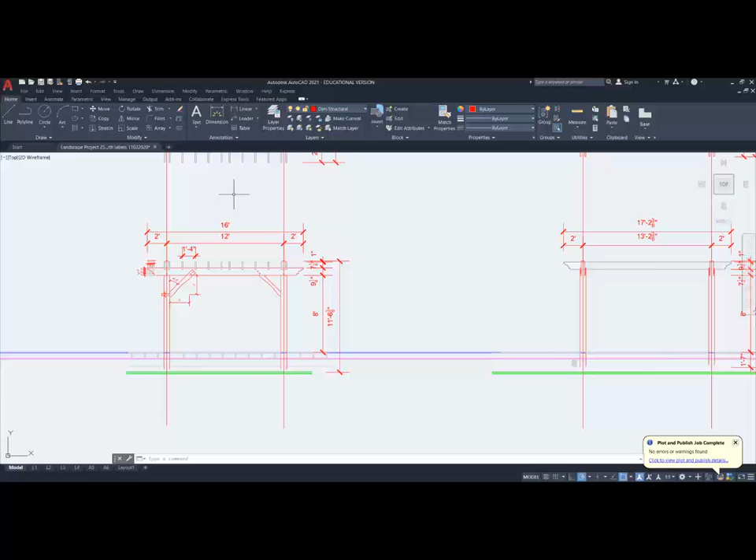Now I've drawn my sectional elevation. So at 8 feet, I've got my blue deck. The deck boards I'm using are 5/4 inch. So I've offset that 5/4. And then I've taken the top line and offset that 7.5. That's my deck height that I've decided to work with.

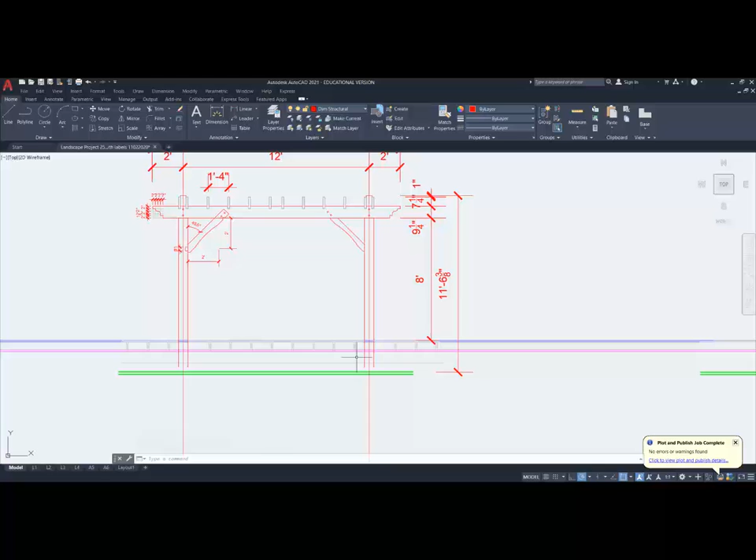And then I've placed in some of the joists that are going to be in the project because the joist sits on the beam. I'm using 2x8s for my joist and my beam. You can just see the top of the beam, and then you can just see the bottom of the beam. So the beam thickness or height is based on the calculations we did much earlier in the program.

So I've already offset those lines. Now I've got to determine how do I connect all this, how is this all going to work together. So this first post sits on top of the beam, but the actual column is offset. So I got to keep that in mind. What can I do to help me with that?

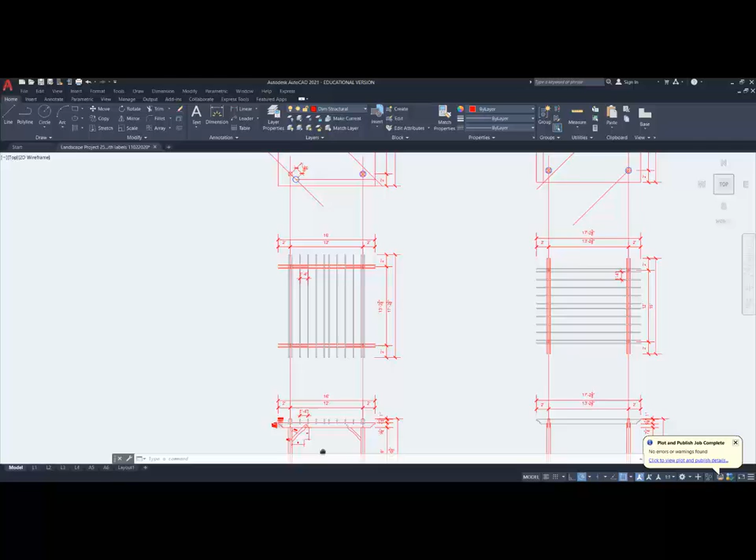I'm going to take this drawing here and copy the different elements. So there's that, there's this, and there's that. This is the independent one. Okay, so I'm going to take that. There's my base point. Zoom out, pan down, and make sure it's perfectly aligned. There it is. And that's my two conditions.

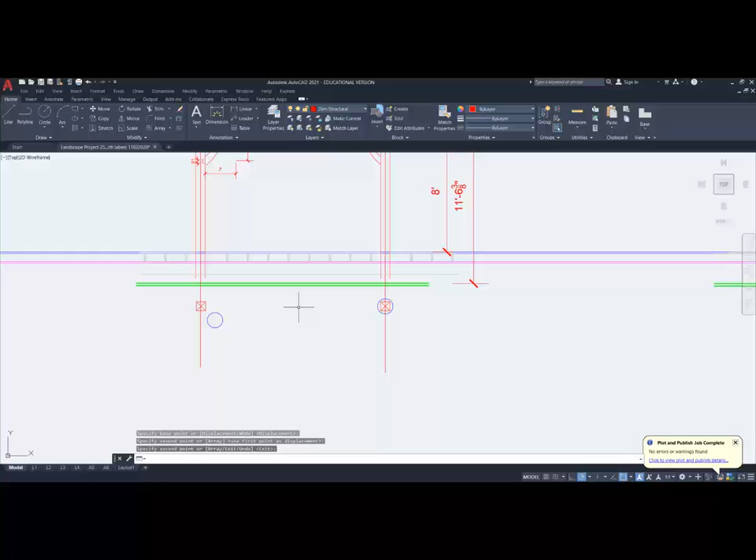So this is my plan view. There's my top view. These are the concrete columns. So I'm going to take the outer edge of them. That is the quadrant from here.

Extend that straight up. I'm in the wrong layer. Thought I switched layers, obviously I made a mistake. I've got a pergola concrete layer. There we go, and I want to make that current.

Good, and then I'm going to copy this from that location to this location. Okay, so the way it sits right now, that is the width of the concrete column. Okay, I've got that already here. I might as well copy that over, from the center point of this column to the center of this, so I know where my two columns are.

Great. This post sits on the beam. The beam sits on the column. Okay, so what do I know? Well, I know a couple of things.

First of all, I know that my footing, and each of these will have a footing, and we'll talk about footings a bit later on - the footing has to be at least 4 feet below finished grade. There's my finished grade. So I'm going to offset by 4 feet this line, and it's always the top line.

And now I know the distance to here, my actual concrete column. There we go, and there we go. The concrete column will support the beam, the beam supports the post. Great. Okay, so this line is just a temporary construction line.

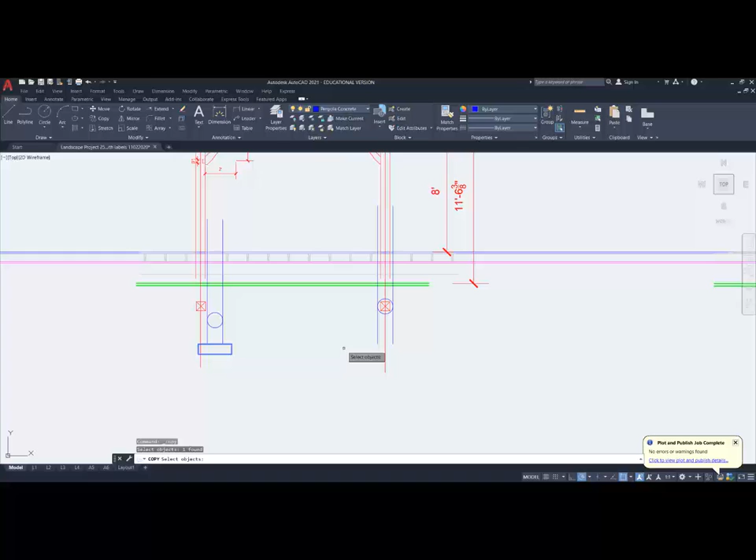Now I'm going to copy that. I can't go from center to center because the centers are at different heights, but I can go from the edge of this concrete column to a point perpendicular to the edge of that concrete column, and there we have our line work. It just so happens that when I copied and pasted it, I did it the right way, so the extension of the lines matched. This also shows me that the wood pergola post is offset from the center of the concrete column. So those are all critical things.

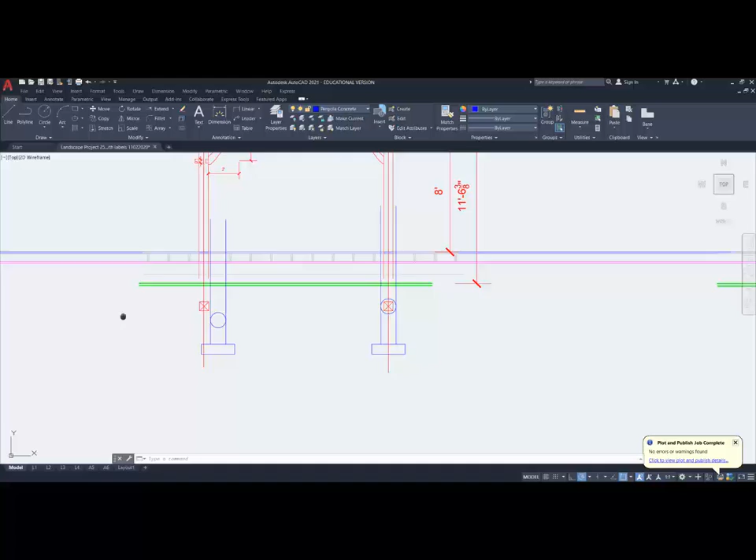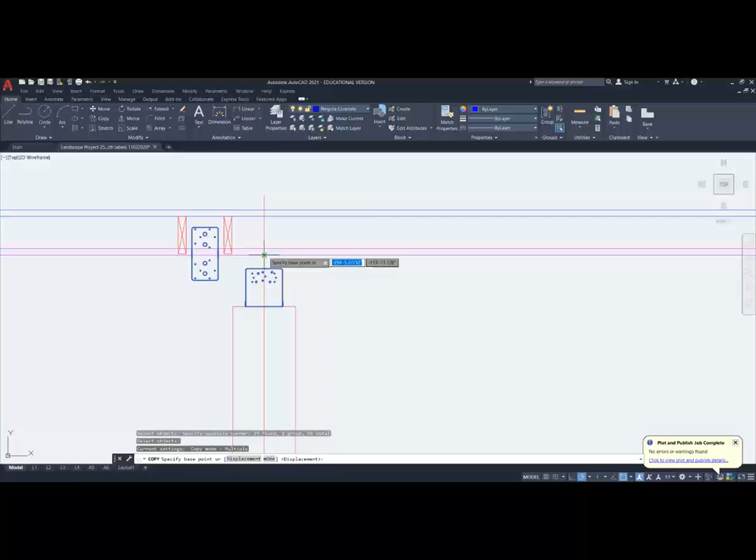Now I'm going to look at how I'm going to attach all these things together. We have two different types of attachments - those are the Simpson strong ties we're going to be referring to. I've gone ahead and already drawn these over here, and those are my two different types of Simpson strong ties. This one is post to beam, and this one is beam to concrete column. I've already got this drawn, so I'm going to use that and place it here. Now it sits right here, but it's supposed to sit in between those two lines, so mid-between, I go from there to there, and there we have the connection.

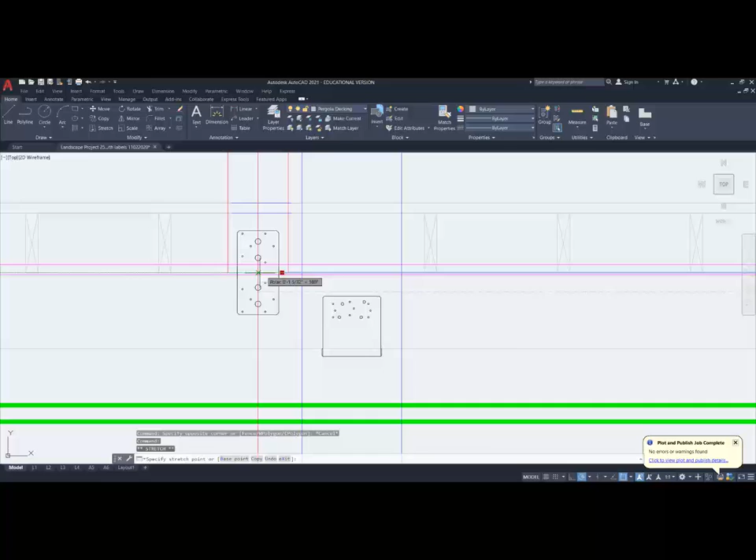So let's try to understand what we've actually drawn. This post here, let me trim that off to its right length, sits on top of that beam here. That's the beam, so that post ends right there - it's sitting on top of this gray beam. Now I have a different line type just so I can see it broken up here. I'm going to pull those back together so you can actually see what happens there. This plate connects that post to this beam. Awesome. But we have a different connection here.

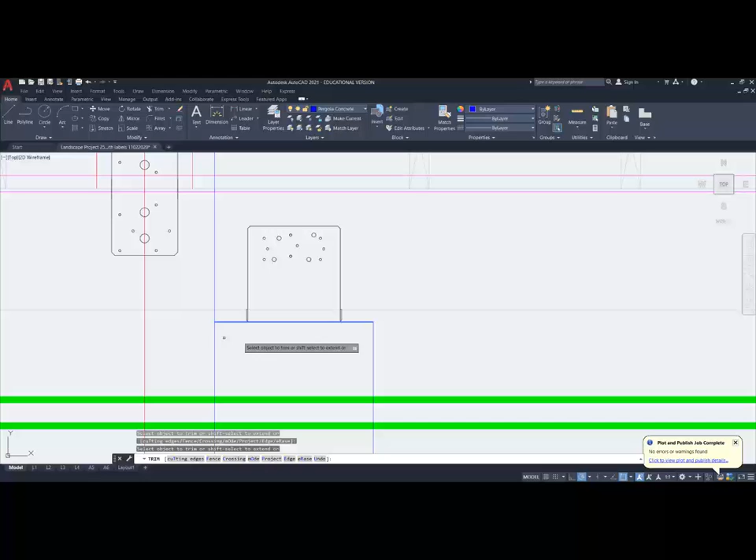That connection is between the wooden beam and the actual sonotube. This line represents the bottom of the beam, but this particular Simpson strong tie has a 1-inch offset, and the reason is we don't want wood sitting on top of concrete - that could create all sorts of problems with moisture. So we leave that the way it is, making sure we have a nice offset. I'm going to pick the midpoint of this thing, go to that intersection, and then simply extend this line right across to there. Now I can trim to the top of the column these excessive lines. There we go.

So we've successfully shown our concrete sonotube sitting on top of a footing. It's using the Simpson strong tie to connect the top of the concrete sonotube to the base of the beam, and then we're using another Simpson strong tie to tie the post to the actual beam itself.

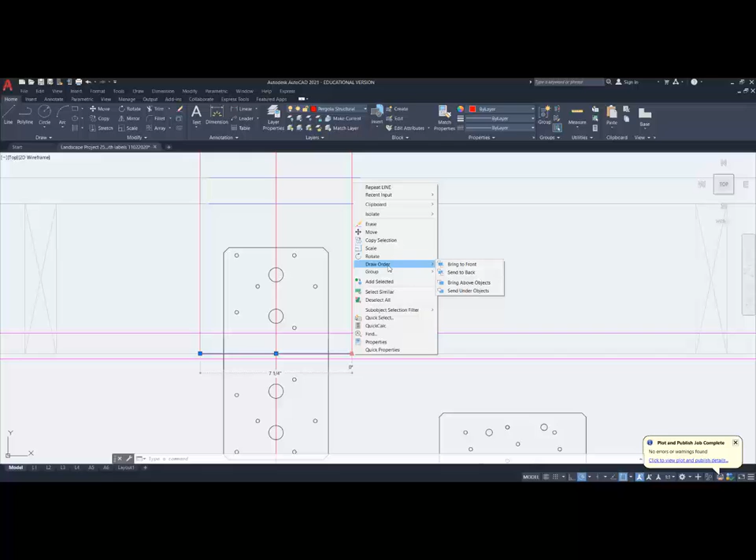So I don't show the line coming through here, I'm going to switch to the pergola structural line and place it here just so I can see it. Now sometimes those lines disappear, they get hidden underneath each other. So what you can do at any time - in this particular case, I always want this red line on top of the beam line - is click on it, right click on it, and there's an option that says draw order. We're always going to bring that to the front so I always see it, so that it won't disappear.

There's a lot of other line work here that is interfering with what we're doing, because it's the deck and everything else that we've drawn, and we'll be removing those lines at a later time. So I've got this one drawn. I can leave that, I no longer need this. This is no longer necessary, and there's all our connections that we're going to be working with in this case.

Now I've got this one over here. This one's different, because this is an independent sonotube that is supporting this particular framing member.

Okay, there's a couple of rules we should keep in mind. The concrete portion should be exposed about 6 inches, 6 to 8 depending on where you are, but 6 inches. So I'm going to make sure that I did just that, and that's how I determine where that grade line is. And there it is, there's your 6-inch gap right in here.

So the beam itself comes down. It comes 1 inch below that is the top of the concrete, and then 6 inches below that is the top of grade. That's how you determine where grade is. So the grade will, in this case, always be 7 inches below the beam, in the worst case scenario, because the beam heights are going to be different, and it's going to be at least 6 inches of exposed concrete. And that protects the base of the beam from getting wet, whether it be from snow or anything of that nature. So that's where I know my top of sonotubes are, right at that location.

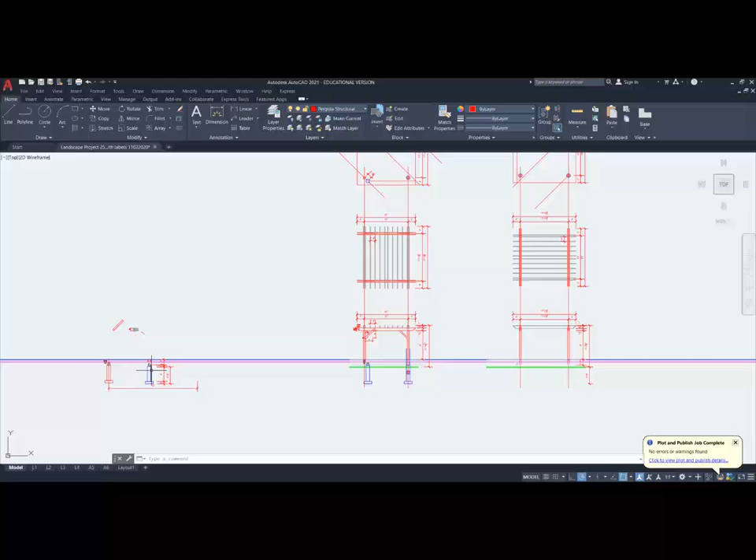It's a different type of connection, and as I've done before, I've already selected it. This DWG file comes right from Simpson Strong-Tie, so I'm going to copy that from there, and I will paste it here. And that's what's going to be supporting the post.

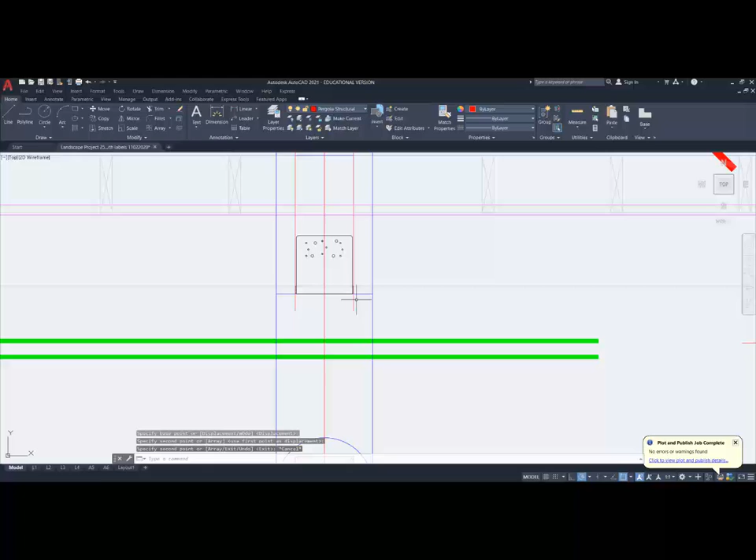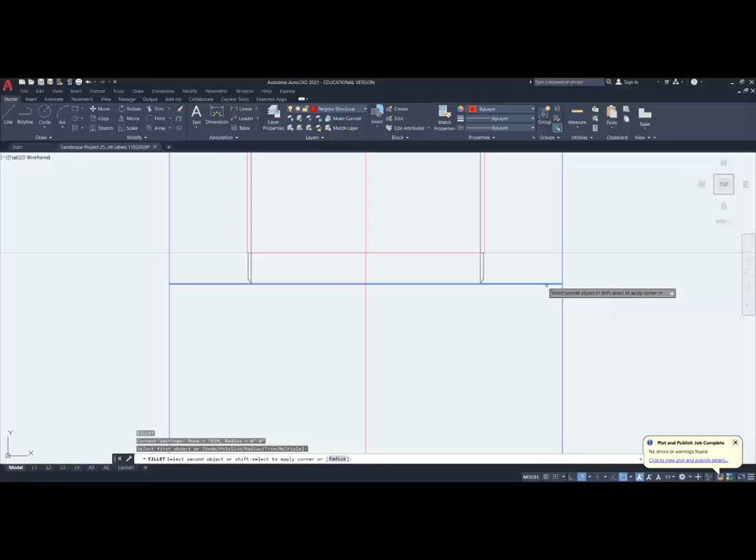The post itself is offset, once again, 1 inch. There's my offset. And now I can fill it in, my post, my post. And I no longer need the top of that sonotube to extend past that edge. And I no longer need this diagram here.

Okay, let me just leave that up for a second. Now, why do I bring that up? Well, the question is, how big is this sonotube? A lot of it has to do with this post. So if I measure the post from here to here, 7¼ inches. It's an 8 by 8.

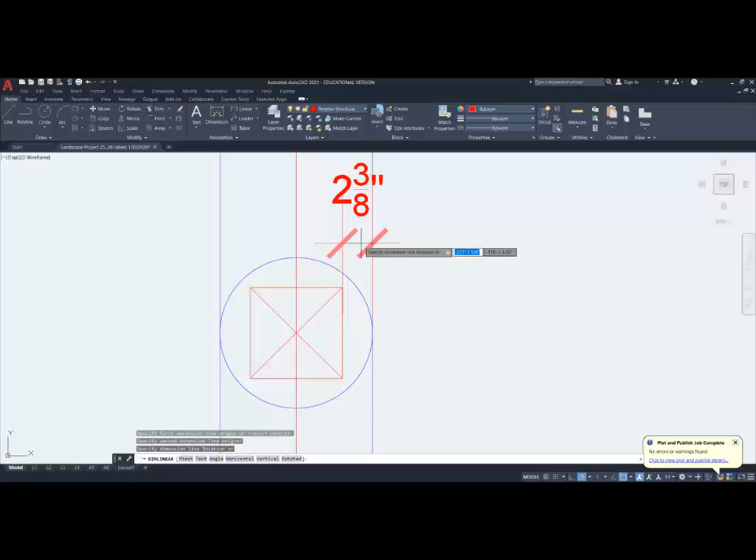Okay, if I actually measure the sonotube itself, there to there, what did I select it? I selected a 12-inch sonotube. Now, why did I pick a 12-inch sonotube? This distance in here, I'd like to have a minimum of 2 inches. And sonotubes come in 8, 10, 12, and so on, at 2-inch intervals. So the 12-inch sonotube was ideal for an 8-inch post.

And as long as I'm also working with, in this particular case, a post of that size, I don't have to change the sonotube size at all. The footing, in our case, is always going to be 2 feet 2 inches by 2 feet 2 inches by 8 inches deep. That's what we're always going to be working with on our project, and that's typical of anything where it doesn't have a roof. When we actually do a gazebo, and it has a roof structure on it, we have to calculate how big that footing is.

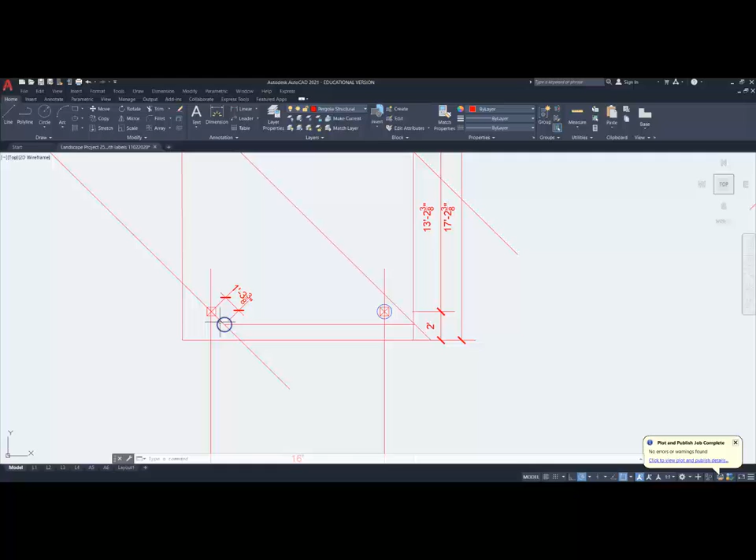But that's what we're going to be using for our purposes here. So this worked out to be perfect for our example, for what we needed. And there we have our 2 different scenarios. Post on beam, beam within a couple of feet of the sonotube, that's this condition. This one, independent post, right on top of a sonotube, and that fulfills our requirements right here. Post on beam, beam on top of sonotube. Here, post directly on top of the sonotube.

So let's take a look at my other condition. Remember, the plans that I have here drawn are at a 90-degree rotation from one another, which means that this post and sonotube configuration is the same as this one here, and this post and offset beam is the same as this one up here. So this one I'm looking at in the bottom right-hand corner is the same as this condition here, which in this case, it's beam on top of sonotube, and the post is on top of the beam.

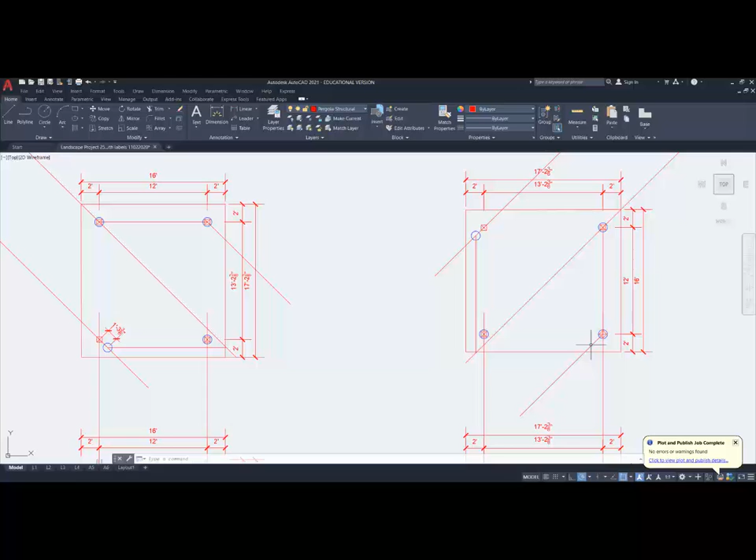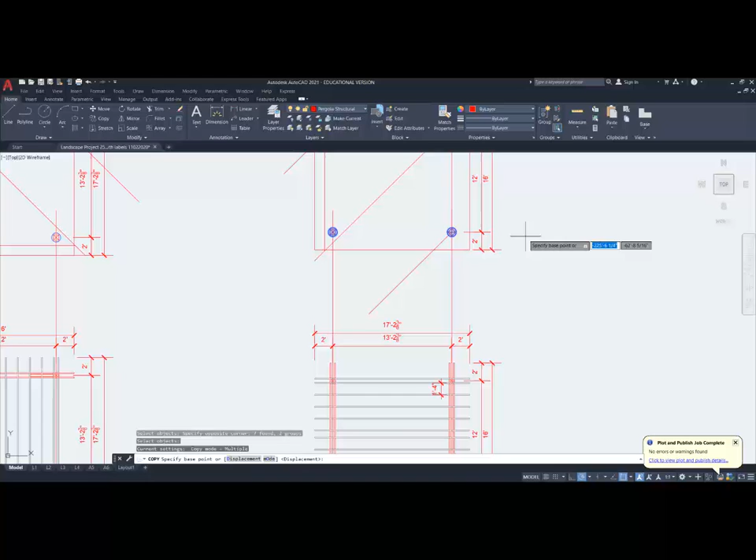So everything's centered, and that's why I've got it drawn exactly the way I have here. And I've extended that one line, this line here, to run through the center of the post, so then I understand the conditions that are below. So I'm going to do the same thing, where I'm going to copy this information here and that one there, straight down to this location here.

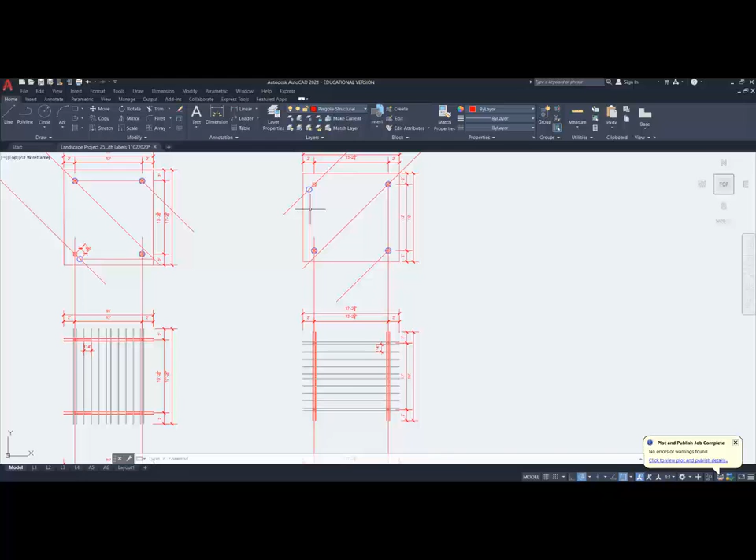And the other thing I've done is this. I originally have a beam that runs between different sonotubes that are for the deck construction. They've got nothing to do with the pergola. This one runs on top of it. So I've also drawn this right here. This is the beam that misses the pergola configuration, whereas this one sits right on top of it.

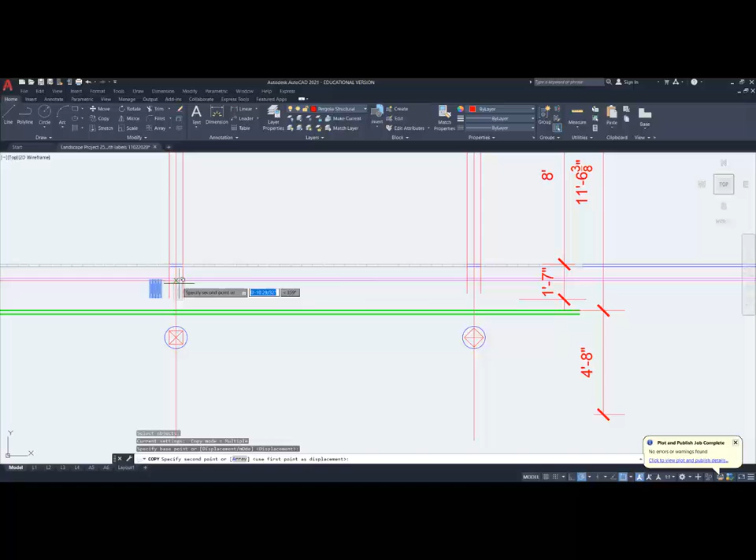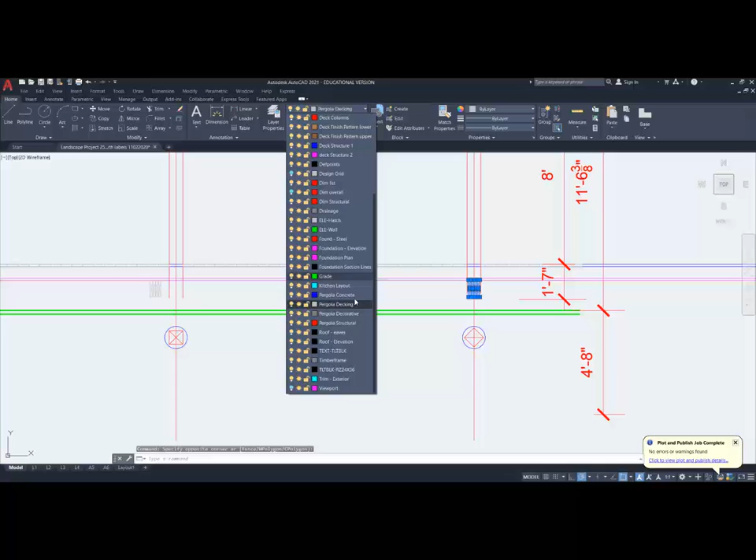So I can take this and copy this right over because that's my scenario. And I'm using my beam structures that I've calculated earlier in some of the exercises we were working on. So mine happened to be 4-ply. And because this doesn't play a role in terms of the construction I've graded out, whereas this one does, I'm going to take that and make it part of the actual structure.

So it's a structural component. You can see the X's through it. And so we're going to have a Simpson strong tie for that, and a different type of Simpson strong tie for this. Now, in this particular case, you'll notice that the footings are more or less the same footing. And the Simpson strong tie is going to go in the opposite direction. So I can easily copy this.

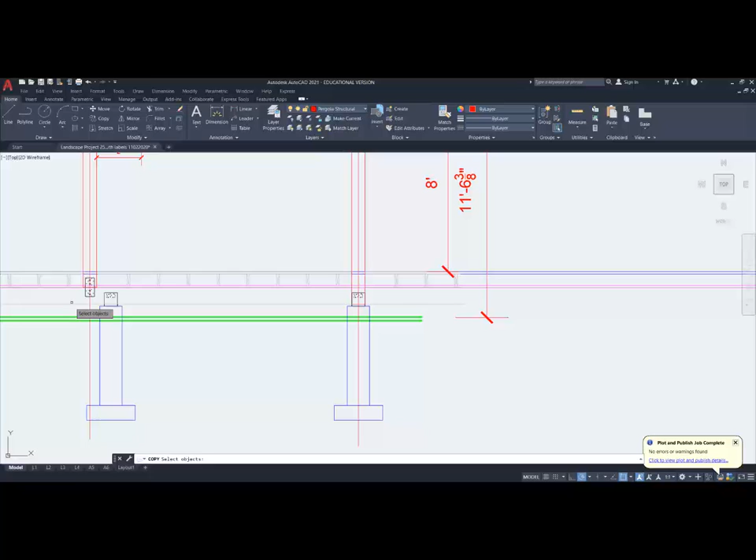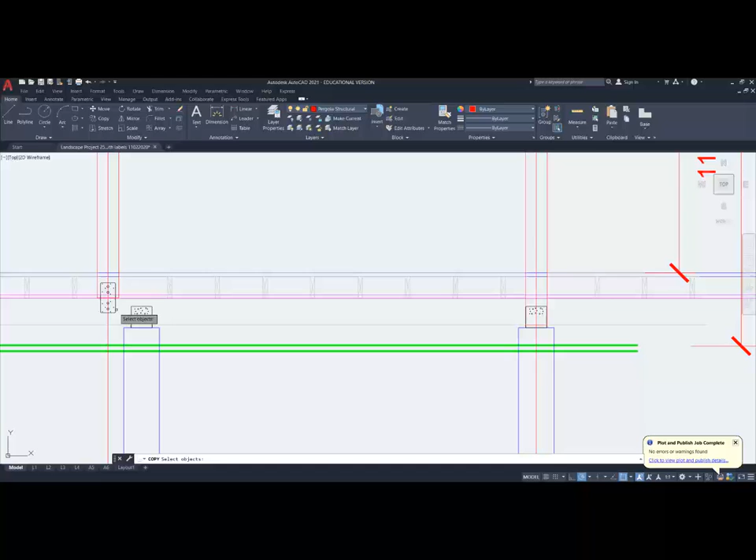Now I'm going to take along the Simpson strong tie just so you can see it. And I will copy it from the midpoint between two points here. Sorry, made a mistake, let me try it again. Copy this and all of this. Great. From the midpoint between two points, then that, and I'm going to pick off the center perpendicular to the center here.

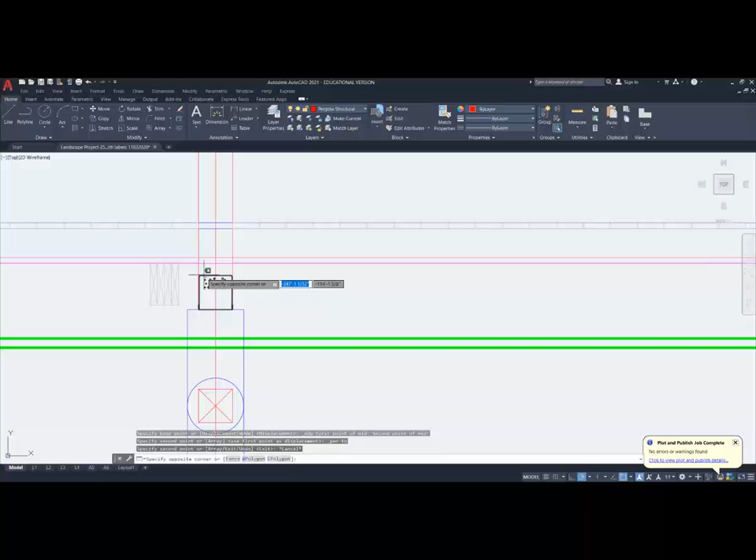But this time, this Simpson Strong-Tie is rotated in the opposite direction. So what does that look like? Again, these are DWG files. They're available right from Simpson Strong-Tie. And it looks like this.

So you can see the two profiles. It's basically a U channel. In one direction, it lies flat on the two sides, and those are all the holes that you can screw in place, whereas the other one simply has an opening. The reason it has an opening, you can see it right there - that opening has your 1-inch offset, and it also allows the screws to only go in one direction, and it's slightly short, so the post has a slight overhang, a drip effect, so that when the water comes in, it can drip off the wood and doesn't settle underneath the metal framing. There's a lot of engineering that goes into stuff like this.

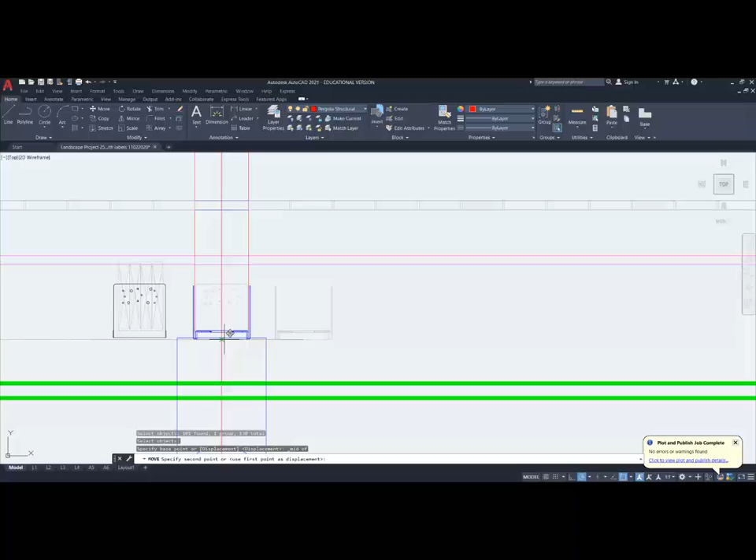So I'm going to take this one and replace it with this one, and I'm going to pick the midpoint down here and tie it right there. So let me get rid of this, I don't need it for this example. And I'm going to see if I can change the color to black. There we go. And my post in this direction - these are slightly wider, but that's okay. When you screw them in place, it fits perfectly.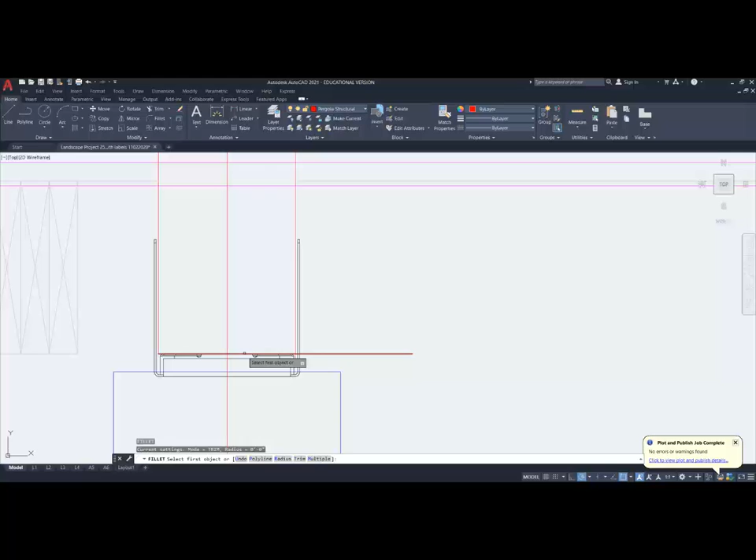I will take that post layer and I will draw a line that comes off of that. And now I can fillet that line to here and that line to there. And there's my post sitting on that pocket that then sits within the actual sonotube, just like this. Perfect. So I've completed this one. It's done. What about this one over here?

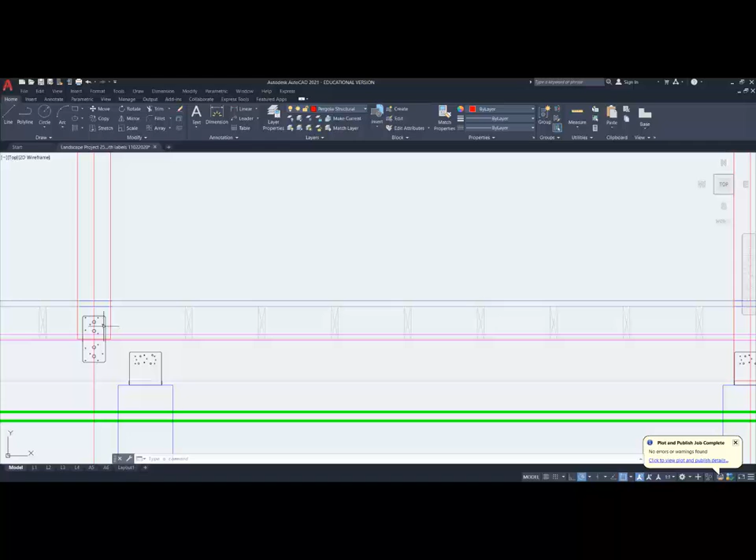Well, what kind of post configuration does that have? Basically, since this post is sitting right on top of the wood, we're going to frame it in place and simply drive some very large screws directly into it. There are some plates that we can put in to reinforce it, which is this one rotated 90 degrees, but it's a flat plate, so you don't see it. So you'd make a note, but you really don't see that particular configuration. So I will copy this and that, this and this, from that center line perpendicular to this center line.

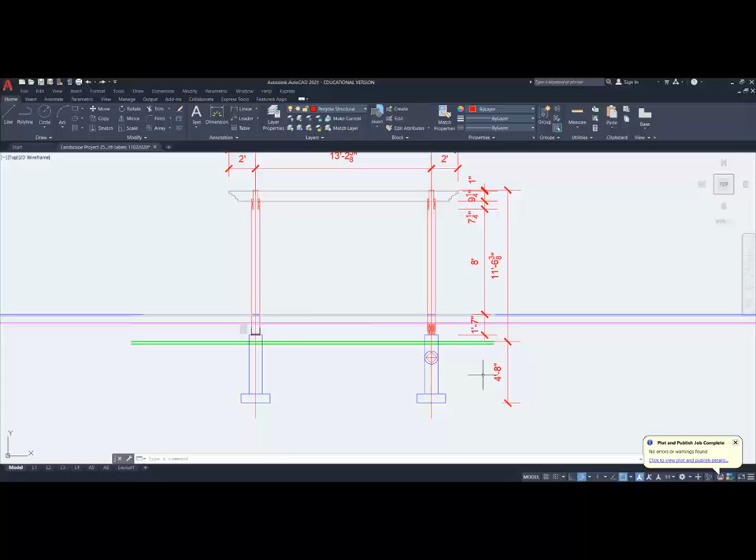And then the beam connection is another Simpson strong tie. I've already determined which one it is, and I found it right there. I will copy it from here to here. Again, those are all elements that you're going to be locating online.

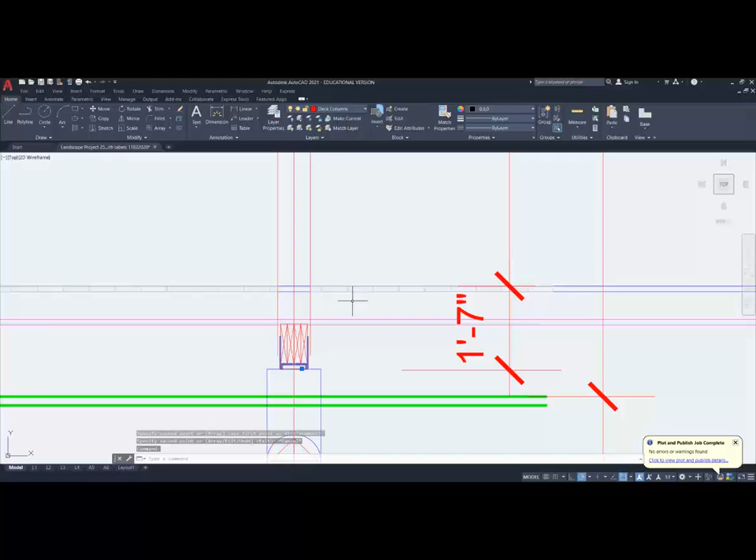And these are all DWGs that are available to you so that you can download them, copy them, and use them in our project. Okay, so I've got a bit of an error here in terms of the height, so I will move that and this down so that it lines up with the top of the beam.

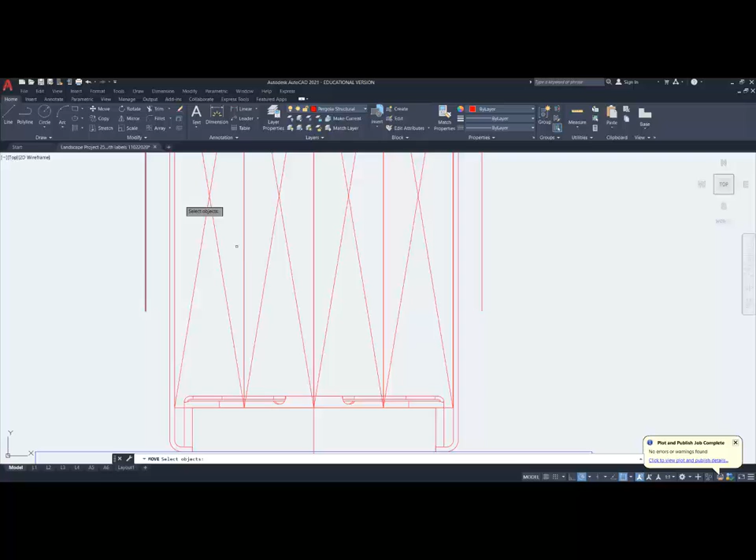I don't think I moved it straight down, so let me try it again. It happens. That, and this, from there to there. Usually when I make a mistake and I repeat it, I just zoom in on it ever so more closely. And let's see if we can change the components of it. I would have to explode it first to change it to black.

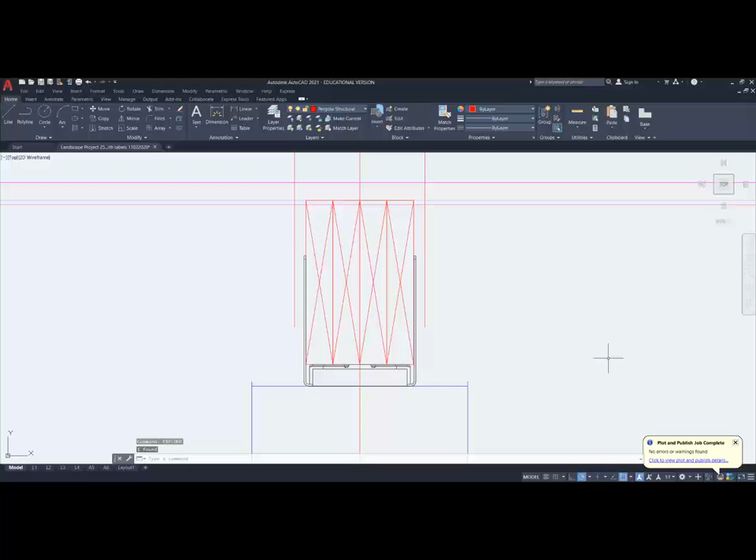Okay, so the post, what is it sitting on? It's sitting directly on the beam. So the post is on the beam, is on the sonotube. Okay, we got to reflect that here. My post is slightly narrower than the beam.

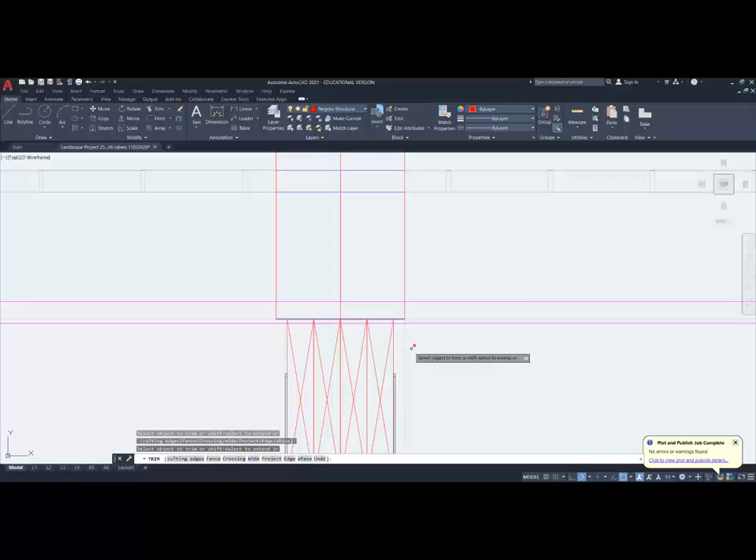That happens. Okay, so I will draw my line work there. And I can then trim to that line my post. So there's a bit of an overhang here.

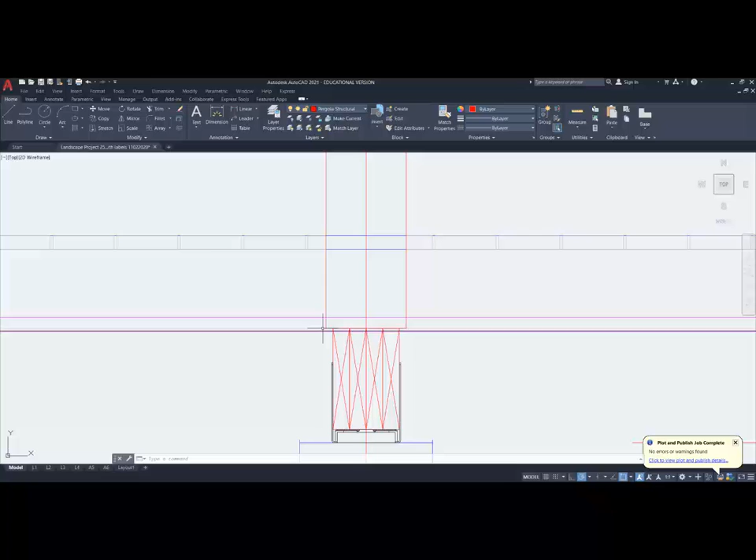Now, there are considerations when we're looking at stuff like this. What sizes are allowed, where the building department may or may not ask you to shore some of this up. So it may ask for a piece of strapping that comes on the two sides, just so that we start with one width and go to the other. Other building departments, depending on how much of a change there is, won't be quite as stringent. So it all depends on where this project is being built, and that becomes important information that you're going to find as you discuss it with the building department.

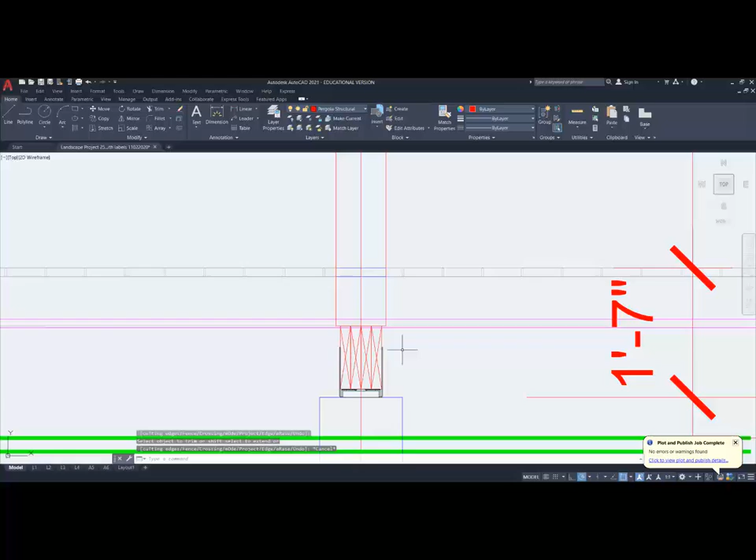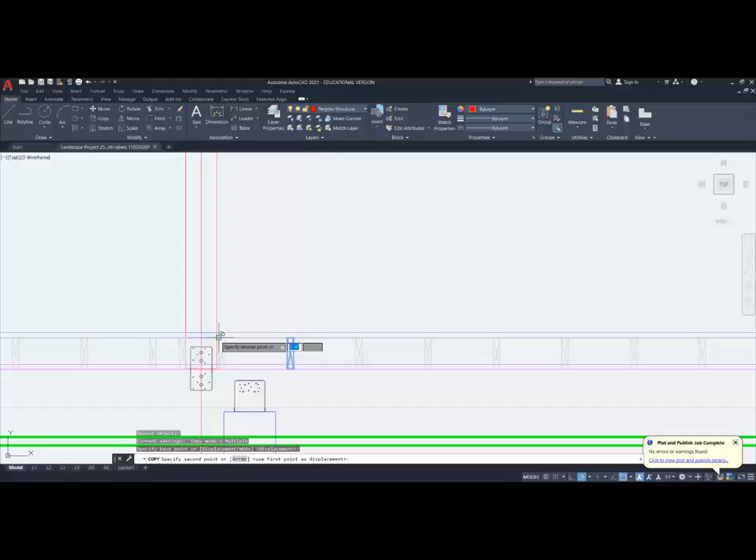Now, it almost looks finished. There's one last step that we need to do, and that is to brace the pieces. So here, it's easily seen. All it is, is two of the floor joists. I'm going to copy this, and they snuggle right up against

the actual posts. And I'm going to show these in red, so when they print out a bit darker than the ones that are there, just to show the builder that those two are structural blocking. They're to support that post. And we have the same on the other side.

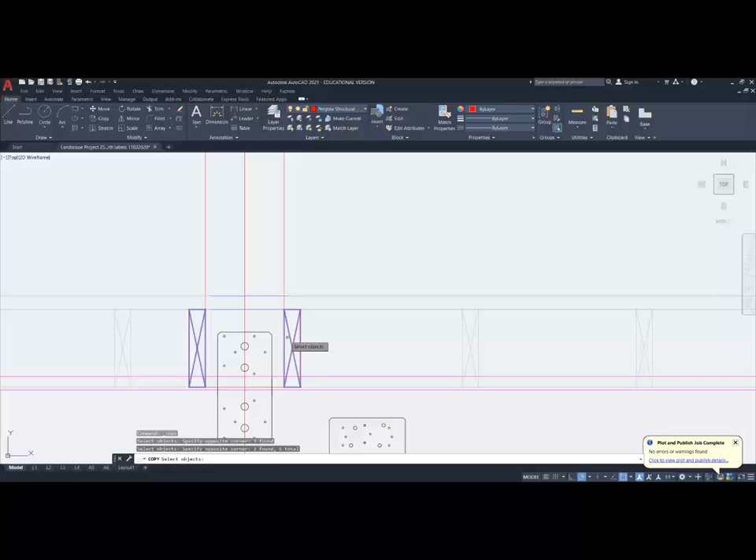So now I can copy this and this from the center line here down to the center line there. Okay, so that shows the blocking in that direction. What about in this direction?

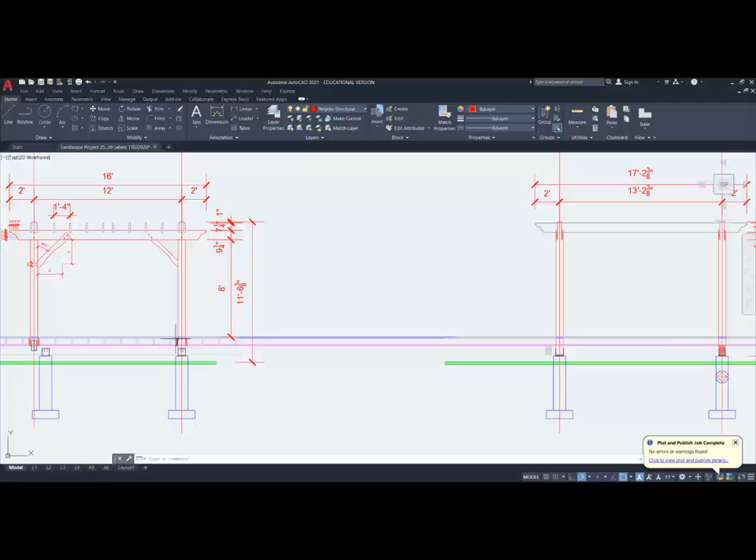Well, really the blocking here are the joists. So the joists are just doubled up to frame out the actual post. So I use the term blocking, but really it's a doubling of joist. What we really have on the other side is true blocking. It's only the width, or in between the joists themselves, and they will be shown here and here.

So you can see how the base of the post here is supported slightly up from the very bottom of the post, where the bottom of the post here is right on top of the wood. And so that's why we need a Simpson strong tie connection here.

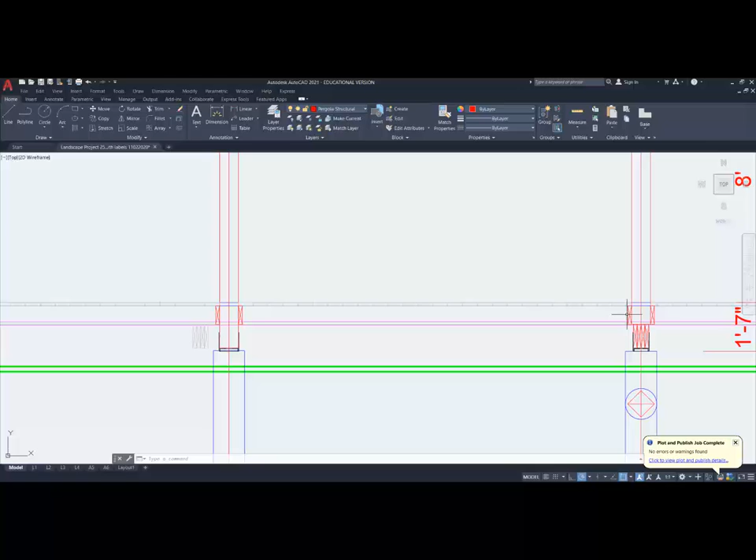And then we can block it up as well, or sometimes in here, because of the blocking method we're using in our connection, we don't need to put in that Simpson strong tie. Sometimes they'll put in a dowel, or maybe just leave it just as is with some nice long 4-inch screws that are screwed right in from the post to the beam.

What we're trying to do is really resist lateral movement. This thing, because of the weight coming straight down and everything centered, it's not going to go in any direction other than somebody maybe kicking out or hitting the base of the post. So we're trying to stop lateral movement.

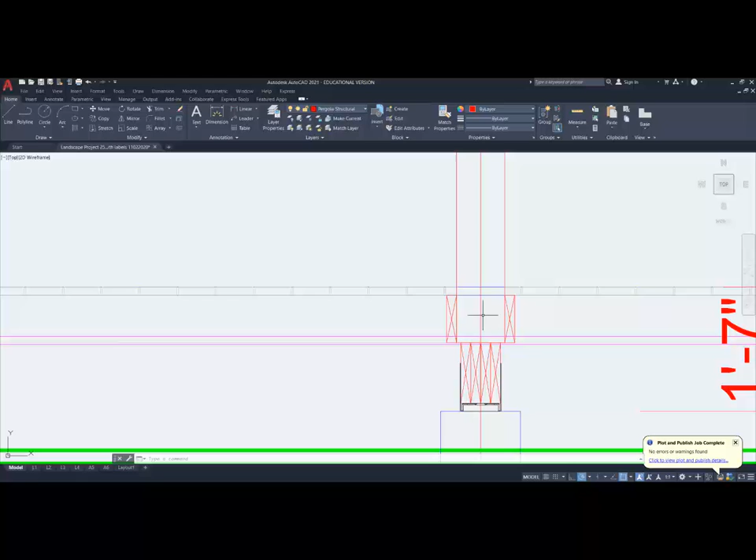That's what we're doing. And then the deck boards, you can see I've shown the deck boards above are just floating in there, just to show you the direction of the deck boards. So the deck boards are in this direction, therefore the joists are in the opposite direction. Down here, the deck boards run the long width, and therefore the joist, you see the ends of it.

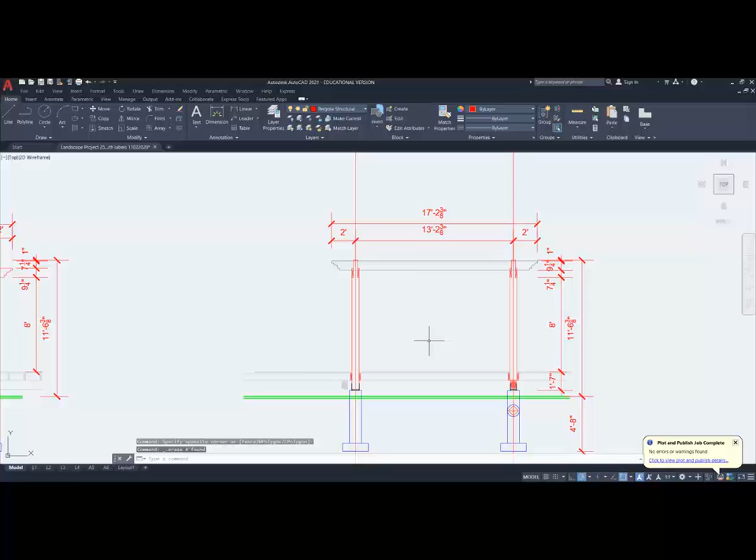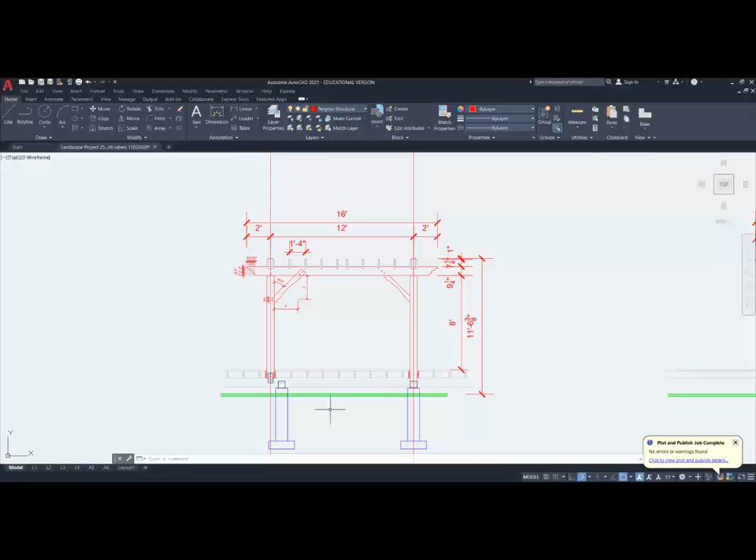If I take a look at all this, and I drew that just so you can see it, this is my final diagram where I'm going to ghost out all of the decking. So whatever's existing, I ghost it out, because then it becomes very prominent how we're going to frame into that deck and what each of the elements are.

So the last thing that we're going to do once that's done — I've done that over here on this side — is complete all the dimensions throughout the entire project so that it's ready to be inserted into the viewports of our L3 and L4.